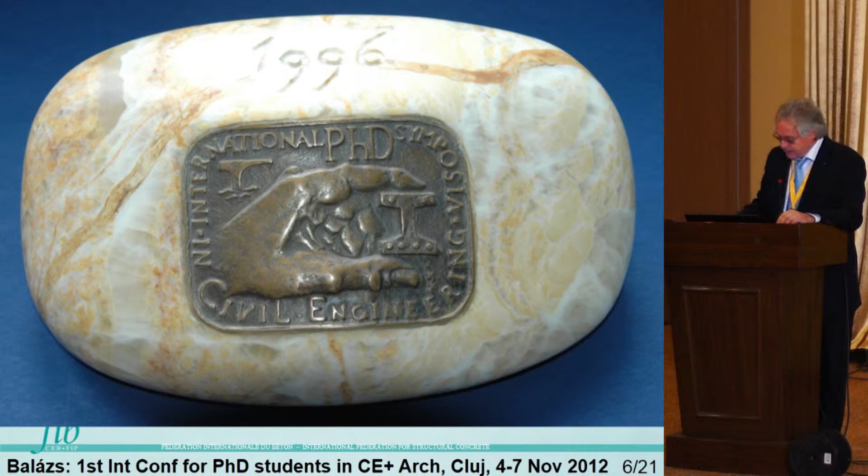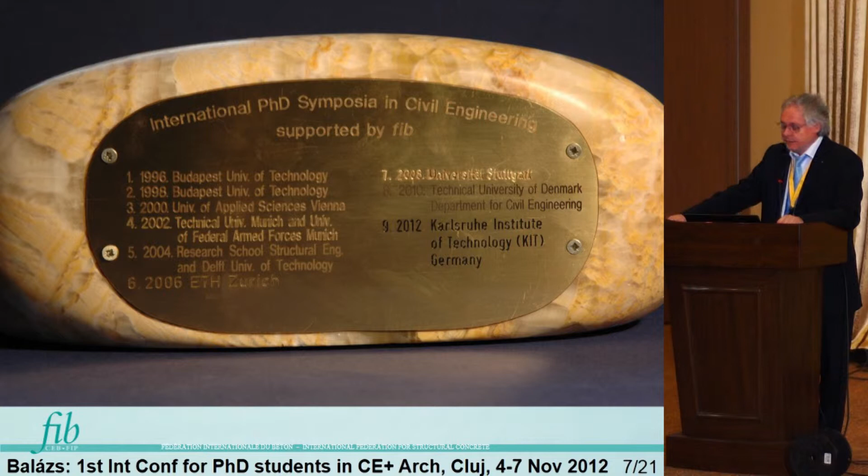It was already mentioned, and we discussed it even yesterday. When I became responsible at my faculty for all the PhD studies in '96, I started with a new idea and developed the International Symposium for PhD studies in civil engineering. And it goes around the world now. I organized it in '96 and '98, and then it was organized in Vienna, Munich, Zurich, Stuttgart, and last time Copenhagen and Karlsruhe. You can come for the next symposium like this one here, but also you can join this series. It comes next time to Canada in 2014, then to Tokyo, and then to Prague.

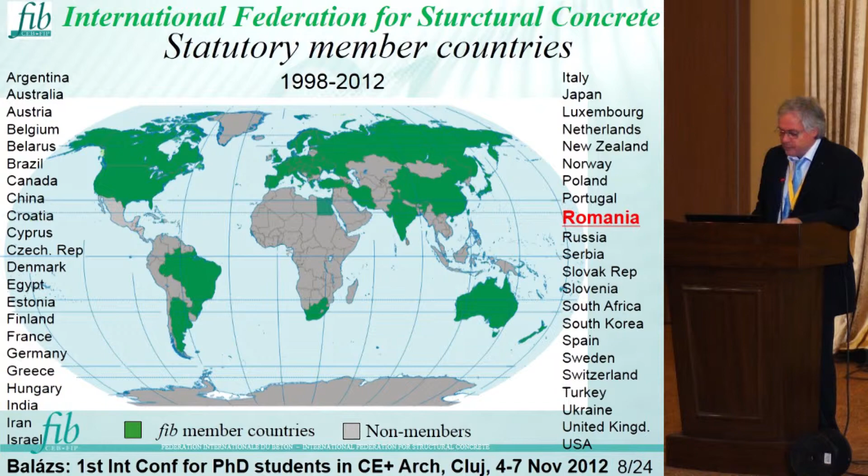FIB, International Federation for Structural Concrete. Some of you are already working in this association. Romania is a member, one of the most important members. FIB is represented in all the continents. We have 44 countries from all over the world, 2 new countries starting this year, South Korea and South Africa, and we are in discussion with several other possible new members. We organized symposia and congresses this year in Stockholm in June, next year a symposium in Tel Aviv, and our congress in 2014 is in Mumbai. You can still send your contribution there.

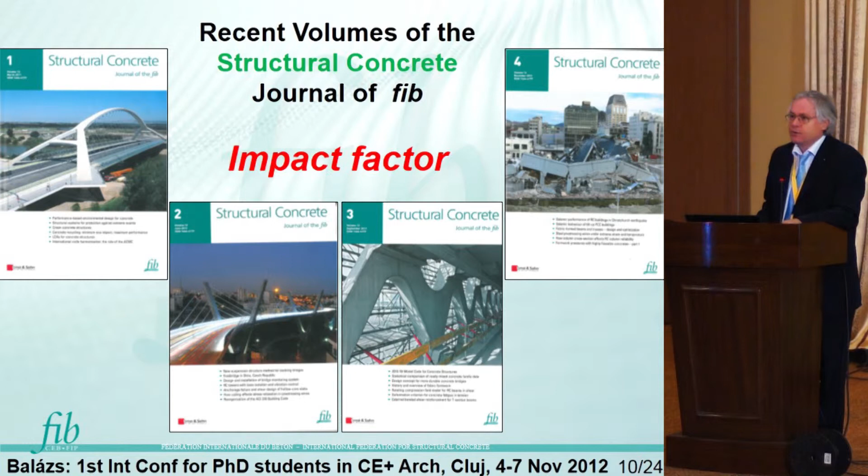We have a very important journal called Structural Concrete. It has an impact factor, so it can be very valuable for your research and PhD evaluation if you go to the committee. So we are happy to receive your manuscript, and happy if you read this journal. Not everybody knows that this is the only international association which even has a textbook. This was a joint product of 18 professors and some colleagues from practice, it can be used in advanced studies, and it already has 5 volumes. We call it Structural Concrete, a textbook on behavior, design, and performance.

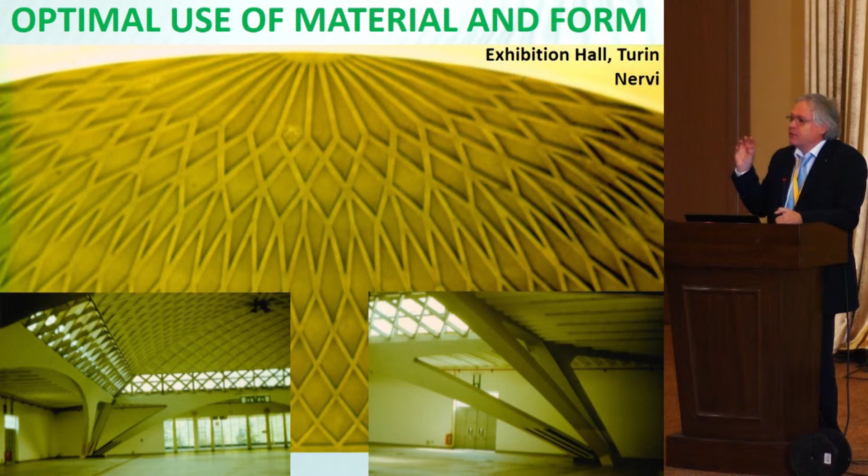This is just one example for myself for the optimal use of the material and the form itself in this shell in Torino. This is a large hall. This is the end part of this hall, as you know. This is the exhibition hall there. And I took one of the tricky constructions. So here you need really a good analysis to find this tricky form, which was awarded also by FIB, to give a special shape and special form of a structure to shock a little bit the people who can see that.

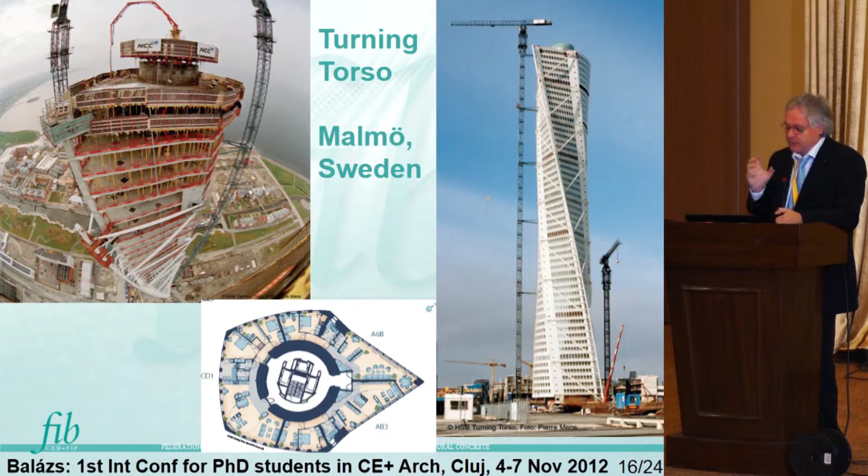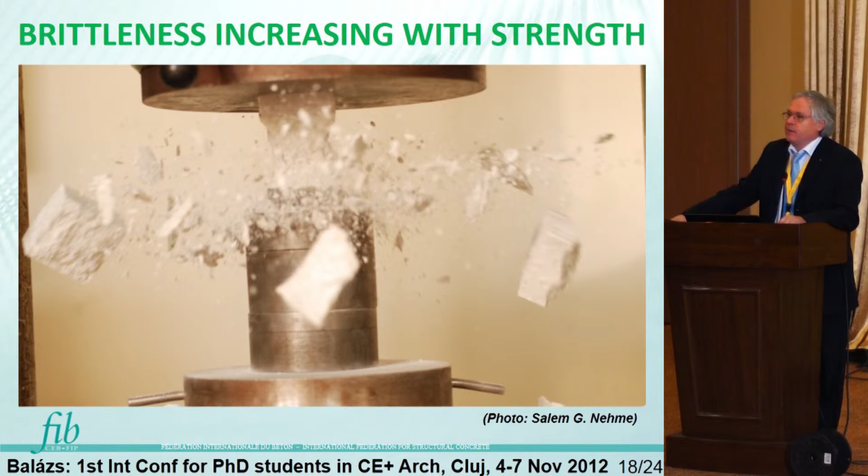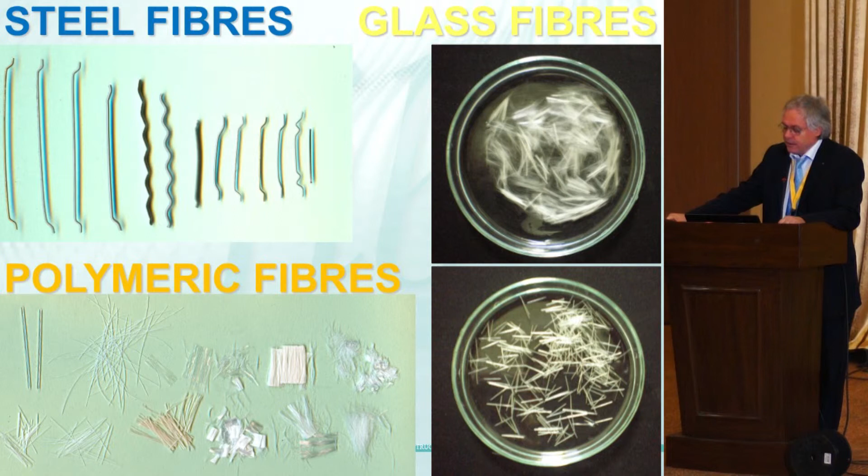We use more and more fibers, steel fibers, polymeric fibers, glass fibers. On the other hand, we are happy with the advantages, but there are some considerations, especially for glass fibers, which are not solved, that not all of them are alkali resistant in concrete, and of course not even those really alkali resistant when the supplier declares them to be alkali resistant. So it should be considered carefully.

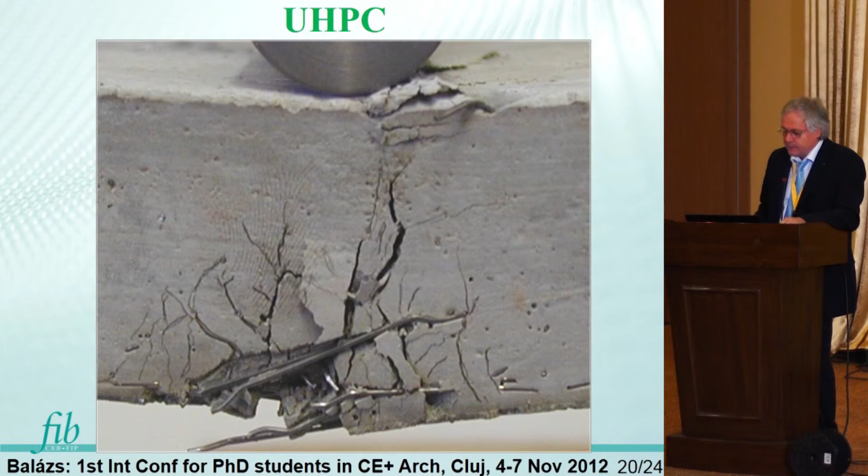We can go into very high percentages of fiber applications, and in this case we get a completely different material. Even the tensile strength increases, compressive strength, and then the incredible increase of ductility and toughness. We have now completely new material. It started already 15 years ago at least. These are 5 millimeter pre-stressing wires. The bottom one is very well known steel wire, and most of you have seen already used carbon fiber polymer wire. Of course, this is a different material, and there are lots of advantages.

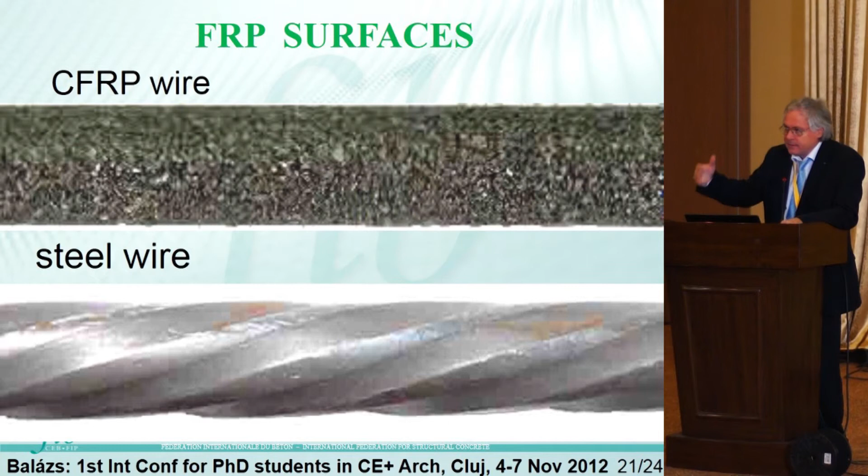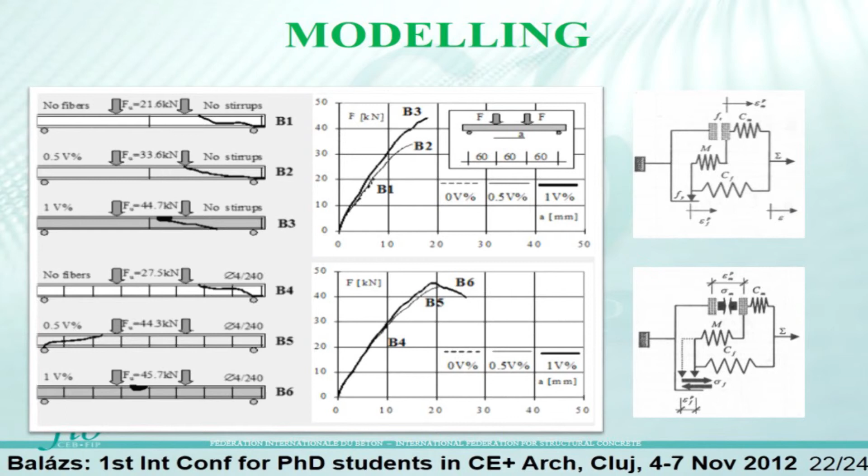For example, with these CFRP wires, electrolytic corrosion is completely excluded. But on the other hand, we have to deal with these materials carefully, and these are always part of PhD studies. We have lots of modeling. This is just one type of modeling. You have completely different types of modeling with finite elements and so on. I just wanted to use the word modeling and to emphasize, I'm sure that a rather large part of the presentations today and tomorrow will speak about modeling. And I wanted to pick up one very important aspect before coming to the conclusion on the next page.

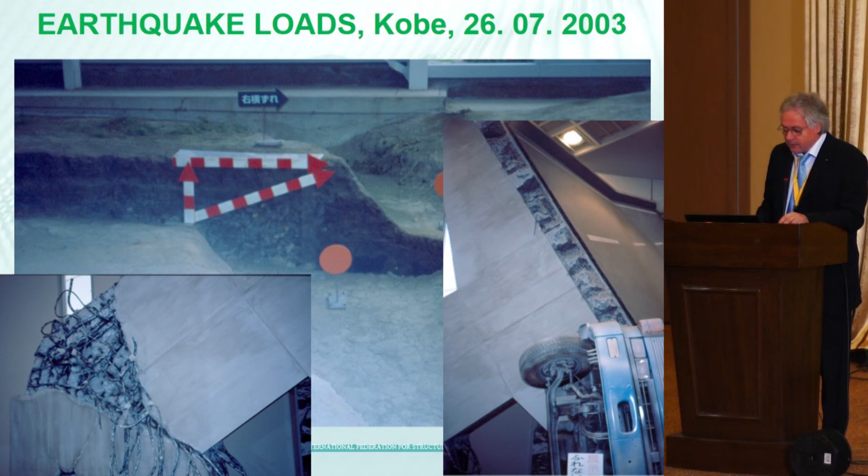So coming to my conclusions and summary, don't worry, I tell it to our young colleagues, you have lots of possibilities for research. There are lots of new materials, lots of new developments in the material field. You can see new types of cement compositions and lightweight aggregates and fibers and anything else. And behavior, I would like to call attention again. We have to be sure about the behavior of these new types of material, and we are happy to construct nice, beautiful, elegant new structures.